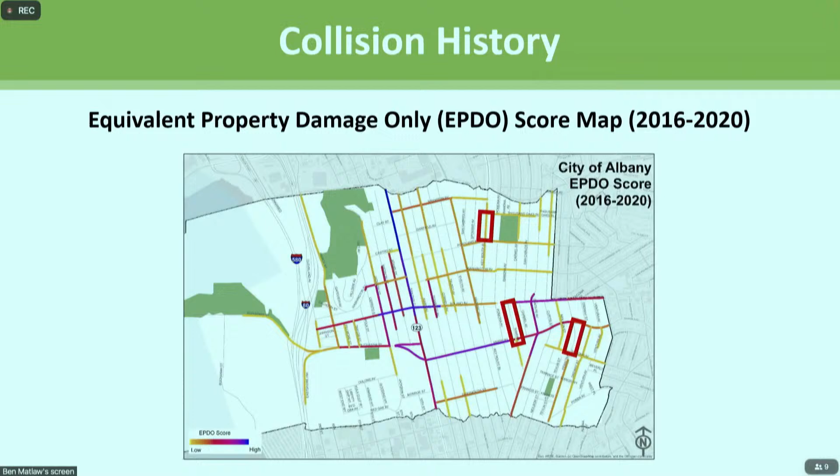High injury network just looks at the number of injuries flat out on each block and intersection. And you'll notice that all 3 of those are not on blocks that are part of the high injury network. So those are the 3 that rose to the top. In the analysis, none of them are significantly more dangerous than other blocks around them, but they do have higher vehicle speeds.

So the recommendation from staff, just a little bit of background on this recommendation, is that we have to make difficult choices about traffic calming projects due to our limited funds as a city. We are looking to incorporate traffic calming measures on additional high-speed blocks as part of the Kains Adams Bikeway project, as I noted before.

If you take all of those blocks in the queue into account, and those additional blocks as part of the Kains Adams Bikeway project, 77 eligible blocks with speeds over 200 vehicles a day are already in the queue for traffic calming. And because staff is moving projects forward on higher risk blocks and does not have additional funding set aside for new traffic calming projects, staff recommends that the Transportation Commission only move forward with 1 additional traffic calming project at this time.

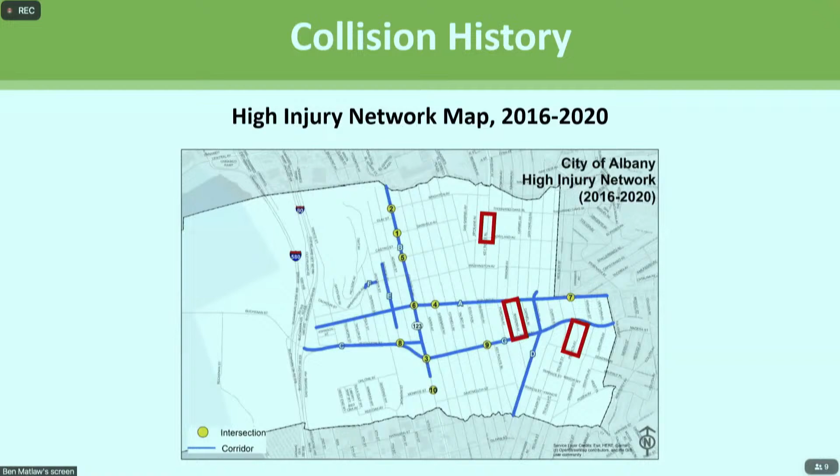I'm sorry, I didn't realize this before. You're in that 800 block of Santa Fe? Yep, about the center. And the proposals are for the 900 block of Ramona, is that correct? You would be more than 500 feet away from that. Thank you.

I noticed on the first chart, pertinent to Ken's comments, the whole corridor of Santa Fe from Marin to the north is included here, except the 800 block of Santa Fe. The blocks on either side of me are listed in the table, but we're not addressing them tonight. Right, we're only talking about the priority 3, I suppose.

Okay, any other questions? It's just a clarifying question for my own historical information. Why are there only speed tables on the southbound block of 600 Key Route?

It may be that no one here knows, but it was part of a complaint. We'll defer to the commissioners with institutional knowledge. Sure, I'll take a shot. When the high school was reconstructed, we had two-way traffic on that side of Key Route, and those speed tables were put in at the time. The other half of Key Route was part of the construction zone, so nothing was done there. These are just left over from that construction project. Thank you.

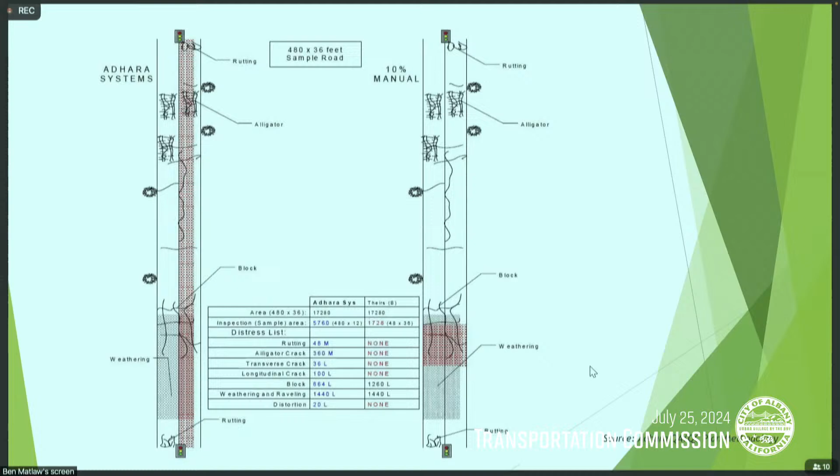For the inventory updates, we went through our roadway network database and Street Saver, and the changes fell into a handful of categories. Typically what we did is match the functional classes identified in our roadway network to the Albany City General Plan, the Active Transportation Plan, and also identified bike networks.

Another discrepancy we found was some segments identified in a staff memo provided to the Transportation Commission back in May of 2019 noted changes to functional class that were not implemented, and that was corrected as part of the inventory updates for this round. There was also one roadway segment, Jackson Street, that was outside of City of Albany's jurisdiction, so that's been removed.

I have a slide here showing our city network and a lot of individual segment scores. The focus is really on the scores assigned to each segment, but splitting this out, we can see our very good streets shown in green, and across the spectrum, streets in very poor condition shown in red and poor condition shown in orange. Again, this isn't really looking at individual scores, but how this stacks up collectively and the distribution of where we have poor pavement.

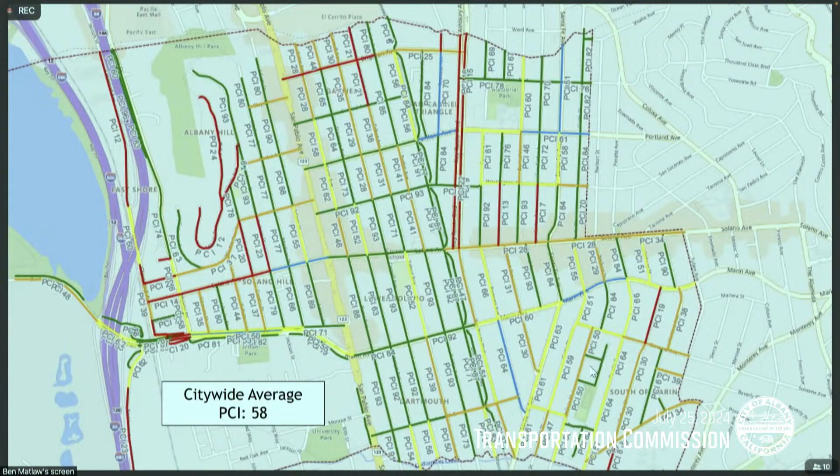The next couple of slides further break that down by functional class, starting with our arterials. We see that our arterial PCI of 56 is close to the citywide average of 58, but there are a number of specific segments bringing that score down, namely on Cleveland and the Cleveland connection with Buchanan and East Shore. We also have pretty low pavement condition on Solano, east of Masonic.

Moving ahead, for our collectors, again it's close to the citywide average, but we see a number of streets contributing to a lower score, namely Solano by the Hill, Key Route, and Brighton.

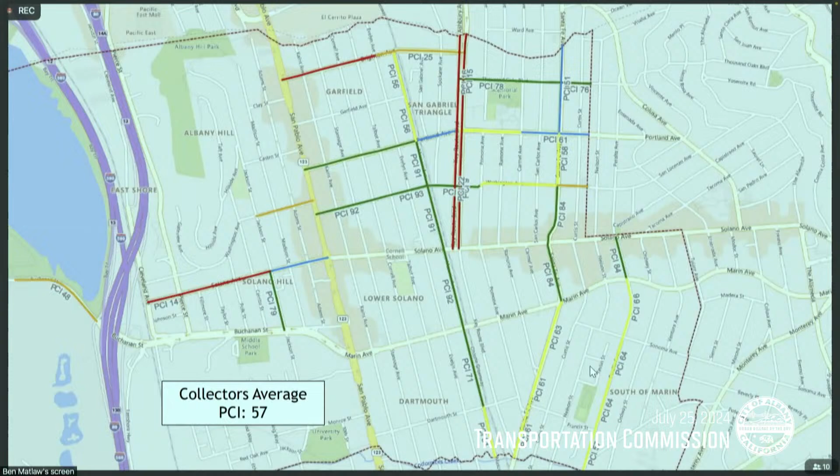Next we have residentials, again a PCI close to the citywide average. One note Commissioner McCroskey brought up is that the condition assessment performed unfortunately does not include the slurry seal project constructed in April of 2024. So there are a number of streets, mostly in the residentials and the other category we see in the next slide, where we did apply some pavement maintenance treatment, but it's not captured in these PCI scores.

We'll see when we get to talking about the work that was done, the distribution of the slurry seal project. There was a lot of work concentrated in the Albany Hill area, where we applied a new slurry coating, but the project also had citywide coverage, and it's not captured.

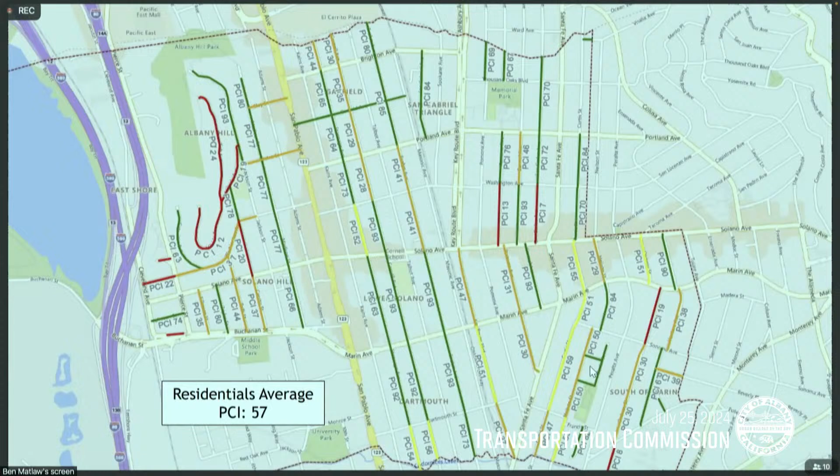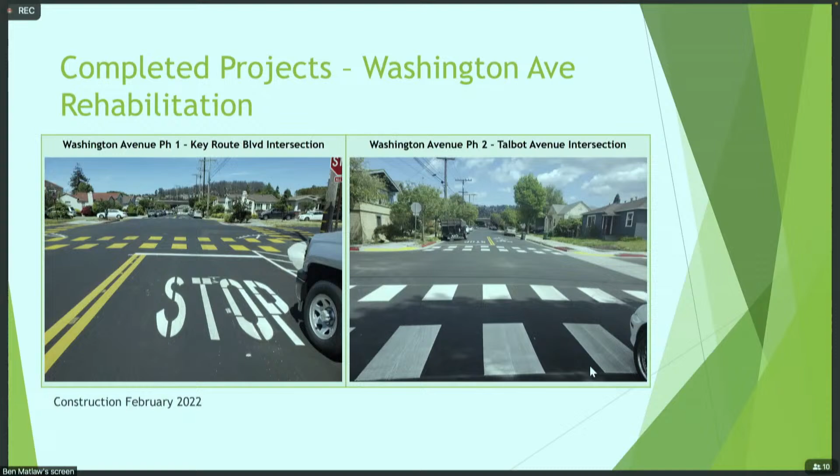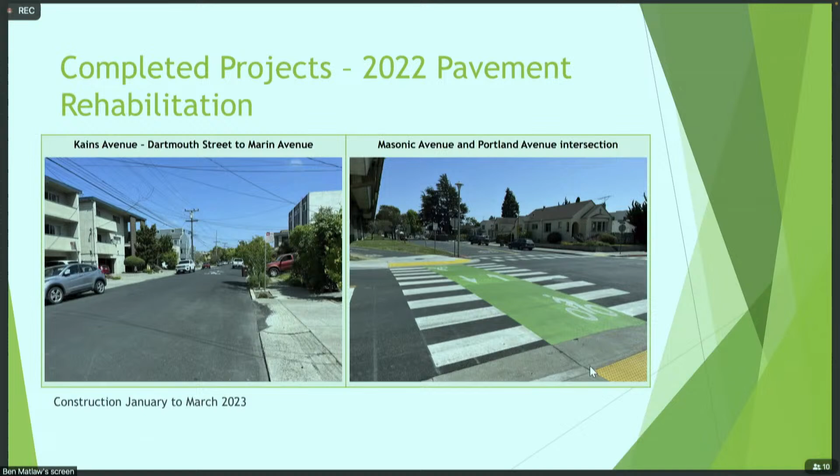So here are some photos from the 2022 paving at Kains and Masonic, and then some additional paving from the Marin project.

Then the jump from 2023 to 2024, we add in a large number of streets. The slurry seal project tackled 7 center line miles of streets around the city. So this is the distribution of the streets that received the slurry treatment, shown in gray.

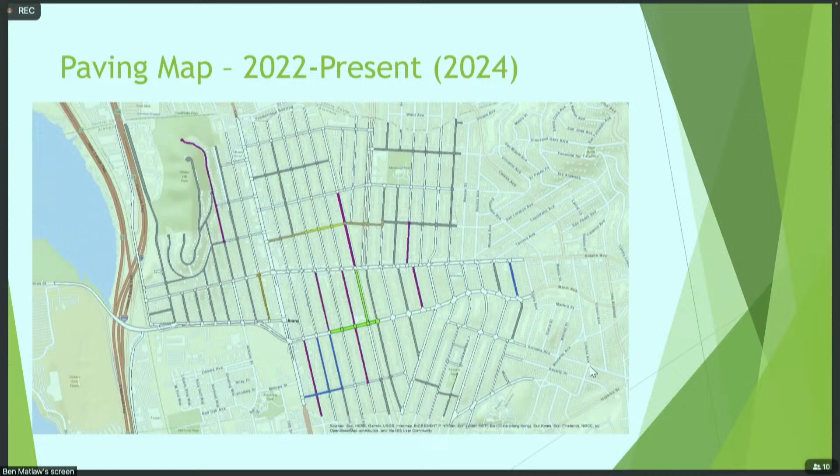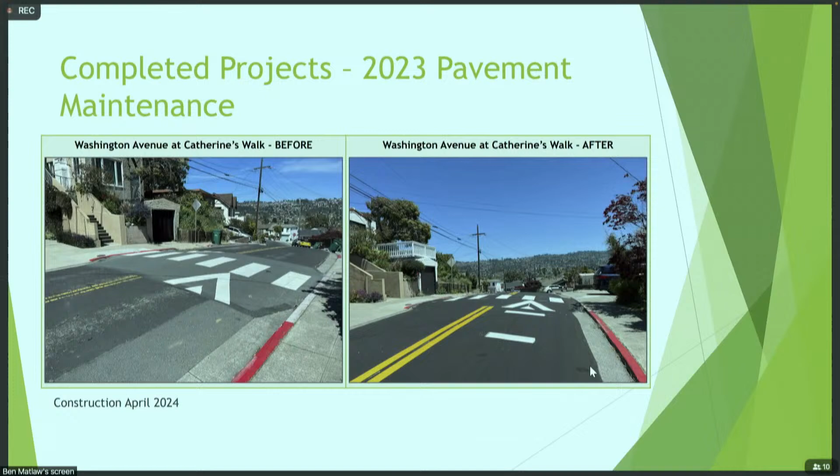One of the things I wanted to show was a before and after shot of our speed table at Catherine's Walk. But I did want to show those streets that were in red and orange and yellow, especially on the hill, did see some improvements from the recent project that wasn't captured in the latest assessment. And again, that's further demonstrated by the big jump in PCI shown in those budget scenarios.

So we do have a number of streets that are still in poor and very poor categories.

Looking ahead, we have two projects on the horizon: Marin Phase 2, the extension of the Marin project from Key Route Boulevard out to the city border with Berkeley at Tulare, as well as the Cleveland Avenue rehab project, which spans from the freeway overpass down, including the connector with Buchanan.

So those are two areas where we have some lower PCI. Further out on the horizon, there are some potential projects that have utility, transportation, or drainage considerations that will need to be looked at, such as the Solano Complete Streets project and potentially improvements out in Brighton and Key Route.

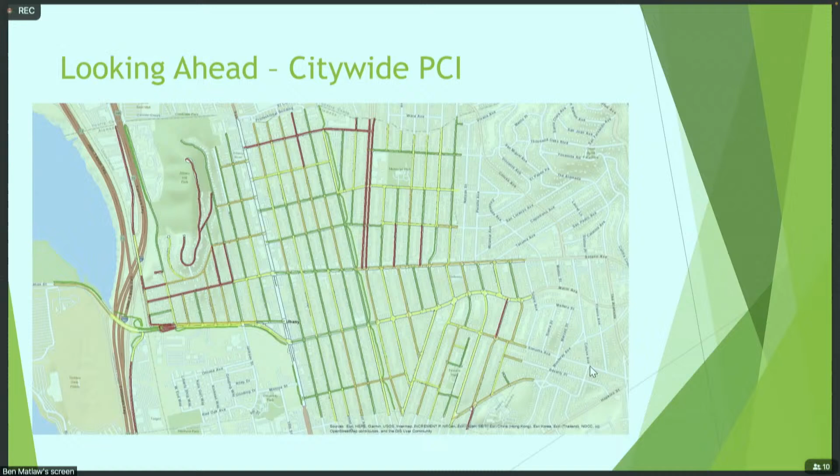So just a short recap: we're seeing a 2-point increase in PCI from the last round of pavement condition assessment, and this increase is across our different functional classes, maybe with the exception of collectors. This current round doesn't include the 2023 slurry seal project, so we're really underrepresenting our PCI score. Based off of the StreetSaver budget projections, a budget of $2.5 million per year is needed to maintain PCI.

We're making progress with constructing our project backlog, and in the last two years of construction, we're tackling our arterials and residential streets, and going back including Washington, we're including collector streets. Looking ahead, we're going to look at additional paving to fit within those two major planned projects I mentioned.

So if we look at the same paving timeline but forecasting or looking forward, again we had our slurry seal project in early 2024, but coming up, anticipated in late 2025, we have Marin Phase 2. And then the following year, in 2026, we anticipate the Cleveland Avenue rehab project.

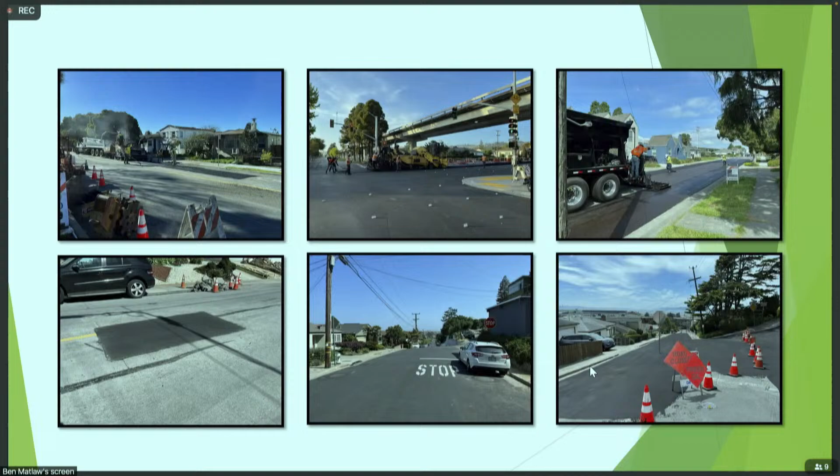That'll end my presentation. Do you have any questions?

Early on in the Biden administration, there was a lot of infrastructure money. Did the city benefit from that federal money? Were there more grants? In other words, is the degree of funding we've had for pavement repair going to be consistent for the next, I don't know, 5 or 6 years?

I'll pass that question off to Allison, who's our CIP manager. Good evening, council members, can you hear me?

So what you see here tonight with the pavement program is funded entirely by pass-through funding and local funding measures. This is not part of any kind of grant. We try to stabilize our paving program funding so we're not reliant on grant funding, because it makes it really hard to have consistent investments back into our paving year to year. That being said, my understanding is that we do not have a current project using the Biden infrastructure funding. The grant funding we received for some of our transportation projects predated that.

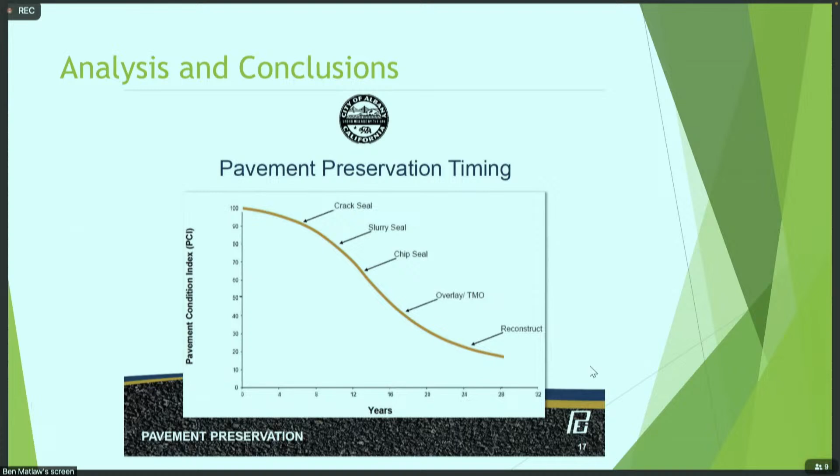One tiny question: on the street decay curve, there was 'overlay / TMO.' What does TMO mean, just for my own understanding? I don't actually recall right now. I'll have to look at it. Me as well, yeah, I'm drawing a blank right now. There's too many acronyms, but I'll take a look. Generally, it's more involved.

Actually, you know what, I do know what it is - it's a thin maintenance overlay. So is this scraping off the top and putting a new surface on, or? It can be that, it can also mean leaving the existing surface and then doing multiple lifts of slurry material to build it up. Okay, so slurry, aggregate, slurry, aggregate, slurry, aggregate. So it overlays, but it's really a maintenance treatment versus a reconstruction.

Yeah, it's interesting because you can have just the build-up, or you can do a grind and overlay where the end result is at the same elevation as what you started with, but you've replaced the top layer rather than just patching over it. And then when you go to reconstruct, you can get to full depth reclamation, where you take up the material and reuse a lot of what's there, which is about being efficient and not using a whole bunch of new material - you get to reuse and recycle what's there.

I did appreciate the comment that we could put seals on failed pavements, which means it's a small layer of nice material that's going to wear out fast because it's still on top of unstable base material. But to the point of, if we spend money fixing the arterials that are in really bad shape, it takes a lot of money to do that. And arterials take the greatest loading, so they're going to wear out faster again than when we bring the residential streets up into good repair, or the bike facilities, because bike paths are not going to wear out fast.